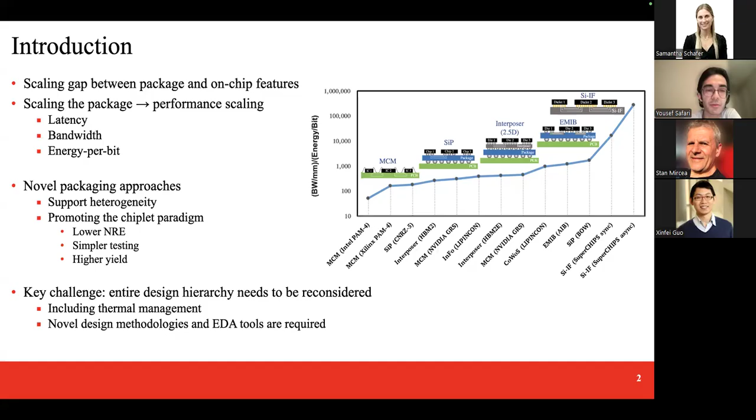So as part of this talk, I will first review some of these compact thermal EDA tools, both on the academic side and on the industry side. Then I will dive into what we proposed in this paper, thermal modeling and key features of ARTSim, the tool that we presented, followed by case studies on three popular heterogeneous integration platforms to show the performance of ARTSim, comparing it to baseline FEM tools and, where relevant, to other compact thermal simulators.

And followed by some future research directions and some concluding points at the end. And towards the end of this talk, we also have a Q&A session, and I will take all the questions that are available.

So in terms of the academic works that have been done in compact thermal simulation, or CTMs, there are a lot of works that have been published before this work, and also a couple of works that have been improved or extended after we started working on ARTSim, which goes back to around 2021 when we started the project.

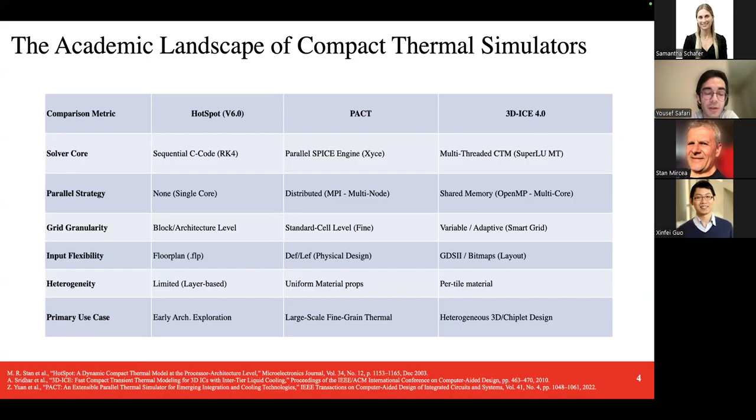But the motivation of ARTSim at the time that we were developing the tool was better support for heterogeneity. And I will dive into why the previous available compact simulators couldn't meet the requirements of heterogeneity that we are demanding nowadays.

On the industrial side, we also have some compact thermal modeling tools. I mean, this terminology of compact modeling doesn't have quite the meaning that we have on the academic side. But there are some tools that can abstract away some part of the design when they are thermally modeling the system. So I sampled some of them that are more available in the market in recent days. ANSYS RedHawk-SC Electrothermal is one of those tools. On the Cadence side, we have Celsius, and on the Siemens side, we have FloTHERM.

Each of these tools has some flows used for compact modeling. For example, on the ANSYS side, there are chip thermal models, and there are some flavors on the other tools. So each of these tools has, for example, the capability to reduce the model complexity, for example, modeling the metal stack from a specific layer above, or a specific model for the devices to reduce the size of the model. And some of them even have more compact models like DELPHI model support, which is a couple of nodes in the system to model the whole thermal behavior.

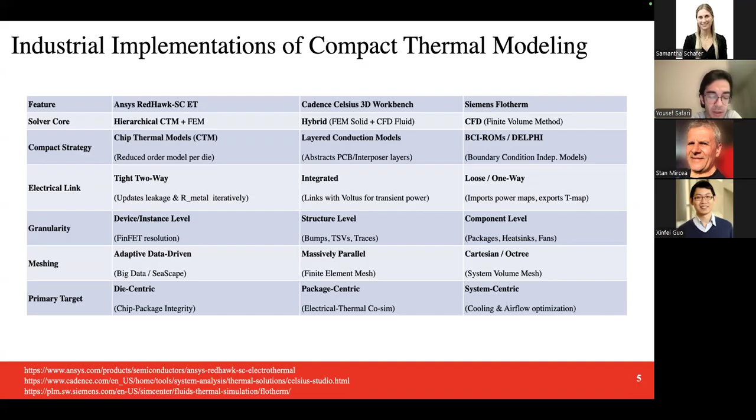And each of these tools differs in terms of the heterogeneity or granularity of the simulation that they can support. For example, from the device level up to structural level, bump, TSV, trace level, and sometimes component level granularity. So those are some of the tools that are available. But again, the engine typically is borrowed from their FEM and CFD engines, not a specific engine for compact thermal modeling, which makes sense given the R&D support they have from their well-established FEM tools.

So with that, I wanted to move to ARTSim, and see what we are proposing and worked on as a thermal simulator. So these tools that we have shown in the past slides, both on the academic and industrial side, are typically defined as compact thermal models. This is one of the two main approaches that people use for thermal modeling. Either you're using finite element methods, FEM-based, like COMSOL or ANSYS tools, or you're interested in a more

compact model, which instead of discretizing the whole system with your mesh into small components and solving the complex equations of that physics for each specific node, you are solving a much simpler model, typically a first order approximation. And that's the key difference between CTMs and FEM tools.

The state-of-the-art CTMs typically don't, or at least at the time that we were developing this tool, fully support chiplet-based platforms. So if you have, for example, TSV units in a substrate or a bridge inside the interposer, or for example, a microbump embedded within an underfill, that's essentially the challenge for the CTM tools: to support these levels of heterogeneity within a single layer.

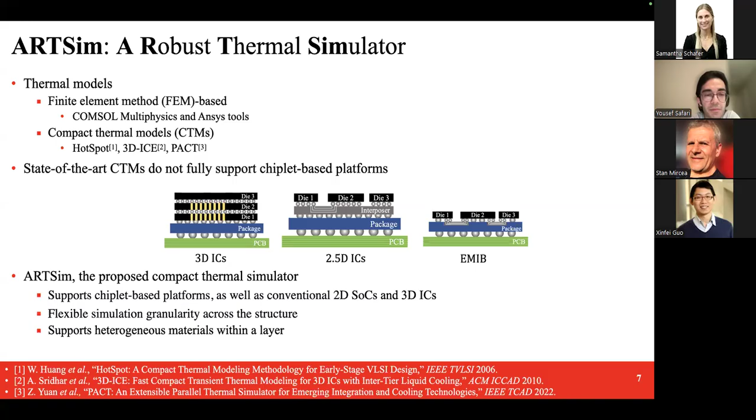In terms of simulation granularity, we can be flexible and give the opportunity to determine the size of the mesh based on the thermal sensitivity of, for example, the block that is of interest to the user, and we support heterogeneous material within a single layer. So it means that you can define the heterogeneity in the horizontal dimension as well. The thermal modeling in ARTSim, similar to other compact thermal simulators, is based on the duality between the electrical and thermal domains.

If we look into the general heat flow equation, with the first order approximation of this equation, we get a much simpler equation, which is very similar to what we have in the electrical domain, Kirchhoff's current law. Based on this duality, the heat generation, shown here as Q in this equation, can be modeled as thermal current sources in the electrical equivalent world, and heat flow is governed by thermal conductance or thermal resistors. And the heat accumulation of the system can be modeled with thermal capacitors, this rho Cp factor that you see.

So the bottom line is that, at the end of the day, the thermal behavior of the system can be modeled as an RC network with some additional current sources. And that's a very familiar problem for us, solving this SPICE network and finding the voltages, which are the equivalent of the temperature in the thermal world. The solver that we are using is a modified nodal analysis based approach, which solves this equation at scale.

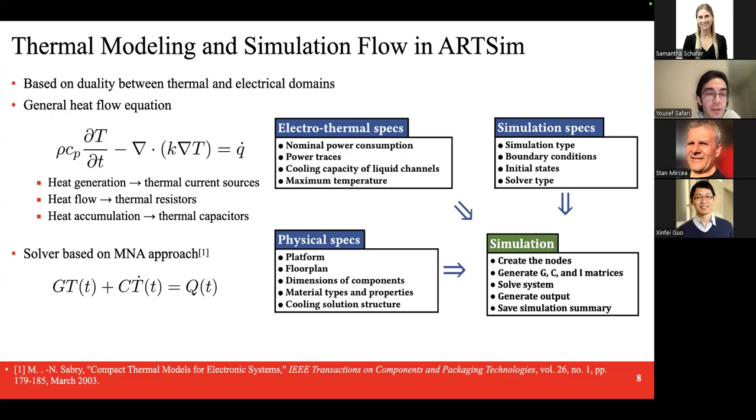Then based on this essential information and the type of simulation, either steady state or transient, the tool creates the network for us, generates the G, C matrices and the Q vector that we discussed, and solves it to generate the required output for each type of simulation. It could be a text report and also a thermal heat map, as well as, if it is transient, a short video of the behavior during the transient simulation.

So the key for supporting the heterogeneity is the fact that we can support different mesh granularity at different layers. If you look into this visual 3D representation on the right side, you can see that the top node and the bottom node have different granularity in terms of the mesh.

And the way that we are modeling in a compact thermal simulator, you define some granularity for each layer, and you assign some internal nodes to each of those cells that you define, which is shown on the left side with some blue colors.

And then the question is, per each of those nodes, you want to find the heat movement, or the thermal resistance between this node and the adjacent node, which are essentially those boundary nodes or those red colored nodes. It's very easy when you have, for example, a grid-based approach. You know the direction and the most adjacent node.

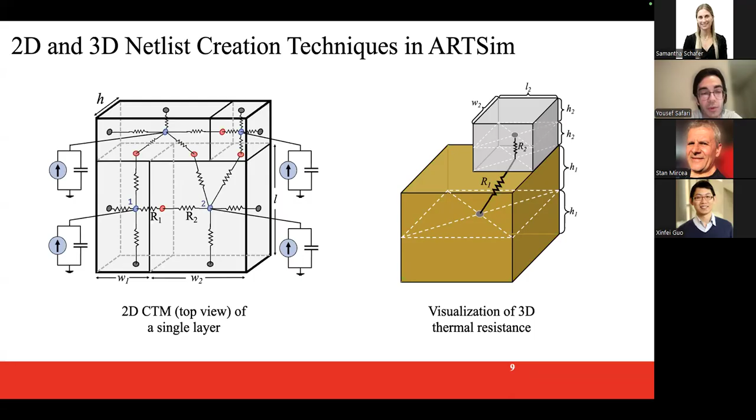The way that these tools deal with this problem is either averaging the material properties for those boundary nodes, or assigning the nodes to the block based on, for example, the center node location, which is in both cases inaccurate. But in the hybrid meshing approach that ARTSim supports, you can assign the meshing granularity to each of those functional blocks based on interest. So if there is a thermal sensitive block and you want to make a finer mesh, that's possible.

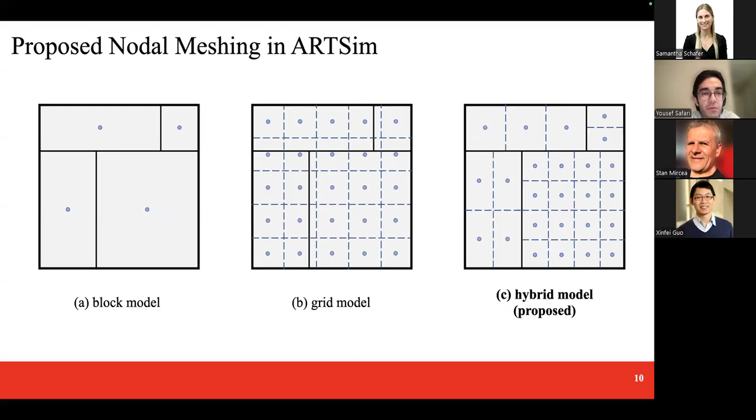That is not what we are looking for in heterogeneous integration. We are interested to see the behavior of this specific bridge inside that FR4 layer. So the mechanism that we propose is a heterogeneous layer. The user can define a heterogeneous layer, and in it the user provides a vertical floor plan in addition to the horizontal floor plan that is always received, which is a prioritized placement order of material within a single layer.

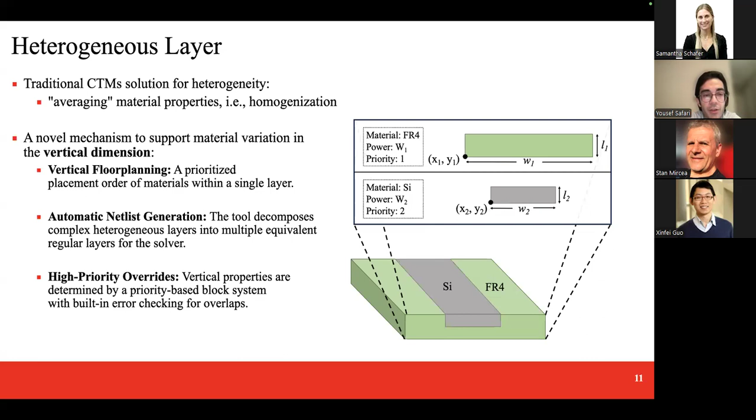In terms of the solver side, we are presenting also a parallel simulation feature for the solver. So the main or the base solver that we firstly presented in ARTSim 1 is based on LU factorization with partial pivoting, which is designed specifically for non-symmetric sparse systems, which is the case for this kind of systems that we are dealing with. So on top of that, we support CPU and GPU acceleration.

So the way that it works is that the thermal netlist or the SPICE netlist that we solve at the end is divided into some subfronts for parallel processing. And on the CPU side, we execute symbolic and numerical factorization using some of the C-level optimized Python libraries. And on the GPU acceleration side, we are using PyTorch tensor operations for massive parallelism in the matrix inversion tasks that we have for solving.

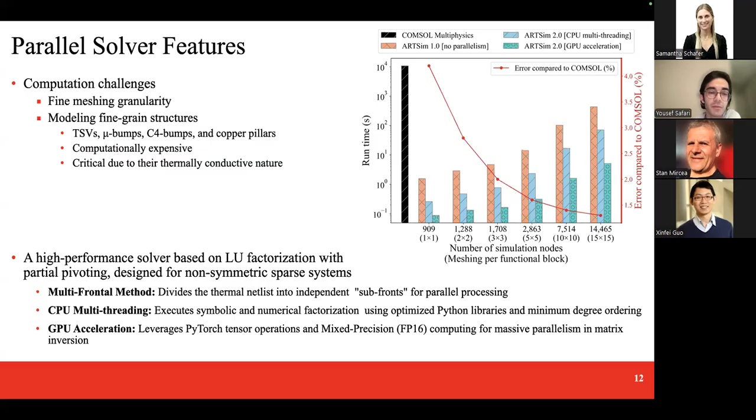So I probably covered the key features of ARTSim, or what we propose in this paper. For the rest, I will show a couple of case studies that show the performance of ARTSim. The first case study is a 3D IC case. It's a 4-layer 3D IC system. For each layer, we are using the specifications of the functional blocks from the MCNC benchmark suite.

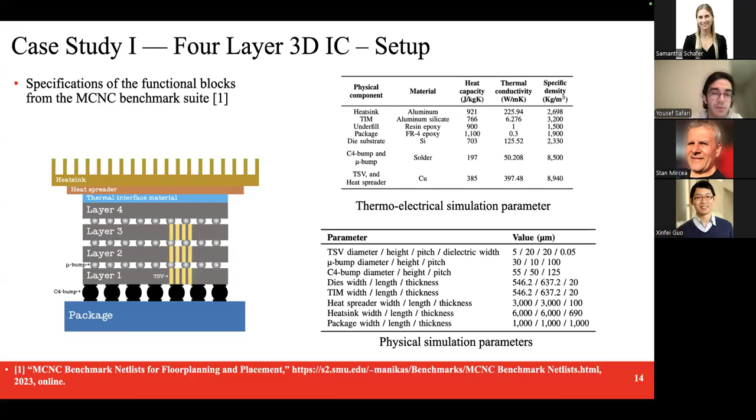It's about 46 times faster compared to HotSpot when we are not including the setup time for the simulation, around 200 seconds compared to 4.3 seconds for a steady state simulation. And it is about 400 times faster compared to COMSOL. All these simulations are done on a single system for fair comparison.

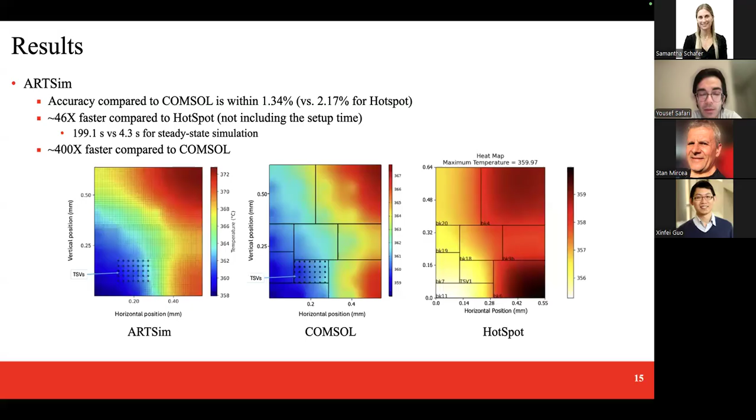The second case study, you can see more details of this in the main paper, but I'm just showing here some of the results. In the second case study we wanted to really show the extreme support of heterogeneity in ARTSim. So it's somewhat a hypothetical platform. It's an Intel EMIB platform. There's a bridge inside the package.

But we're also combining this by embedding some SOI waveguides in the bridge to make it more heterogeneous in terms of the simulation platform. The SOI waveguide that we are using here is a rectangular silicon core with silicon dioxide cladding. The two dies are connected using microbumps to the substrate,

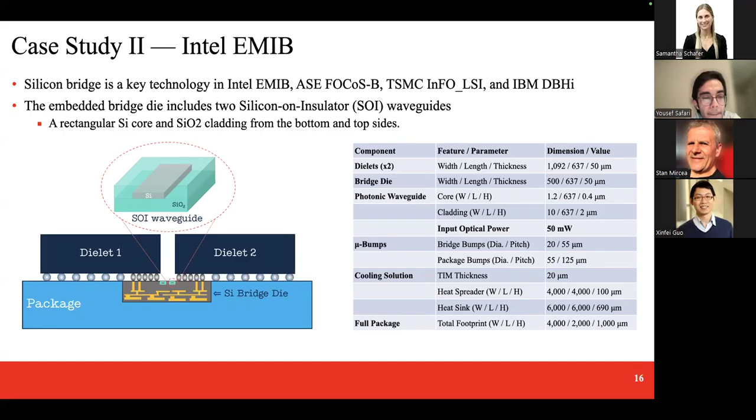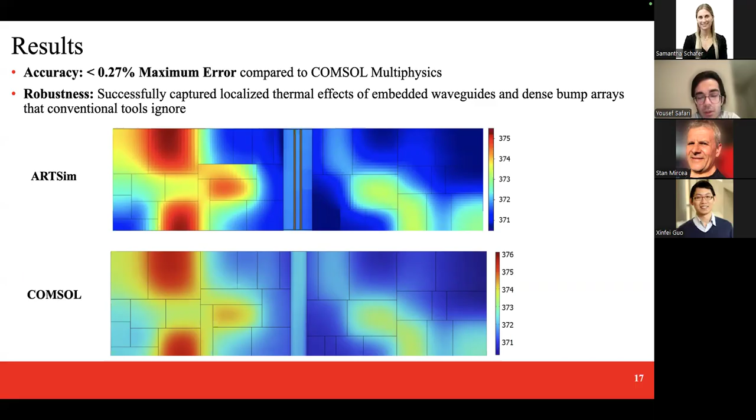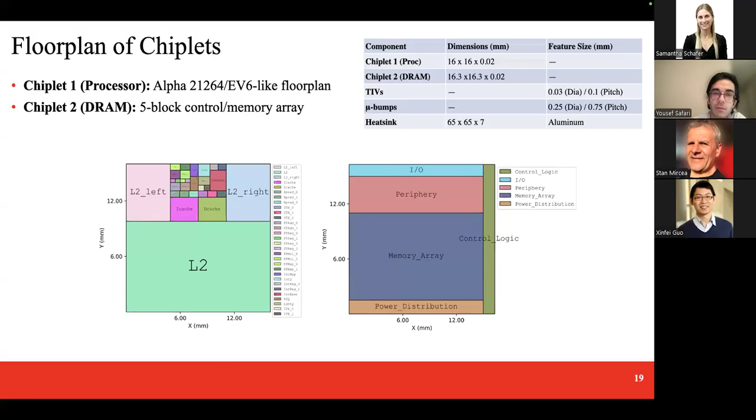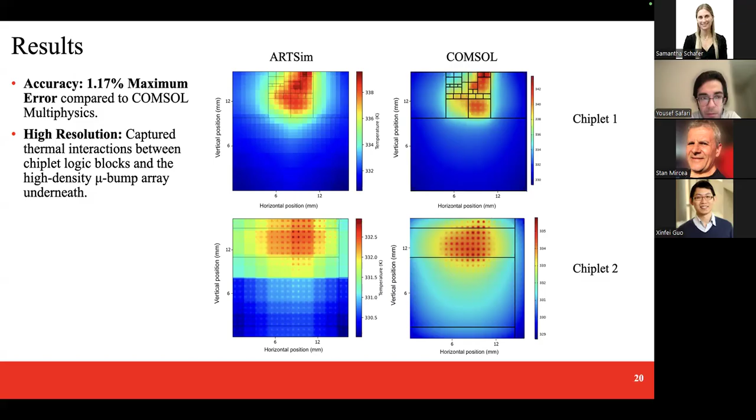So with that, there are a couple of things we can think of for improving this work, future research directions. On the solver side, we're always looking into more capable solutions, for example ML-based. This work can also be extended to a thermal prediction tool rather than just solving the thermal behavior.

The other feature is automating the CAD integration. That's probably one of the keys to industrial adoption of the work. Supporting standard EDA formats, like GDSII for layout, the MCM file for the physical die, or the .brd file typically supported for the board.

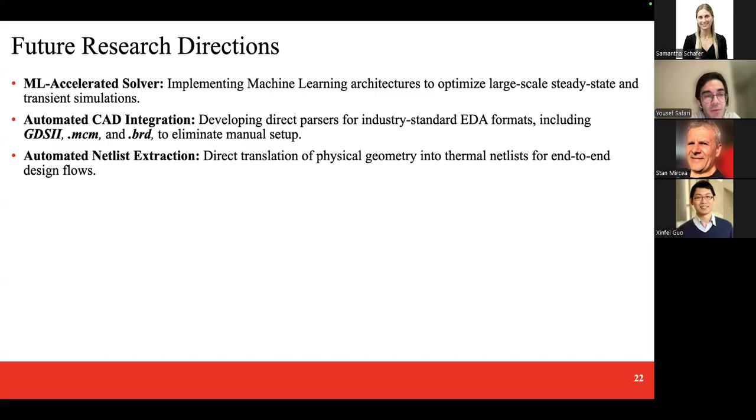Automated netlist extraction, so the direct translation of what the user provides as physical geometry into the thermal netlist. These are some of the possible avenues in which this work can be extended.

So with that, heterogeneous integration is becoming the reality nowadays. This requires reconsideration of our EDA tools and design methodologies, and the thermal part is key to that. ARTSim, which stands for a robust thermal simulator, supports heterogeneous integration at the extreme.

It provides FEM-level accuracy with the speed and flexibility required for design space exploration in designing 2.5D and 3D systems at the earliest stages of design. The tool also has features so that it not only can be used for thermal modeling of the system, but can also be a handy and useful tool for designing a new package, given its support for heterogeneity.